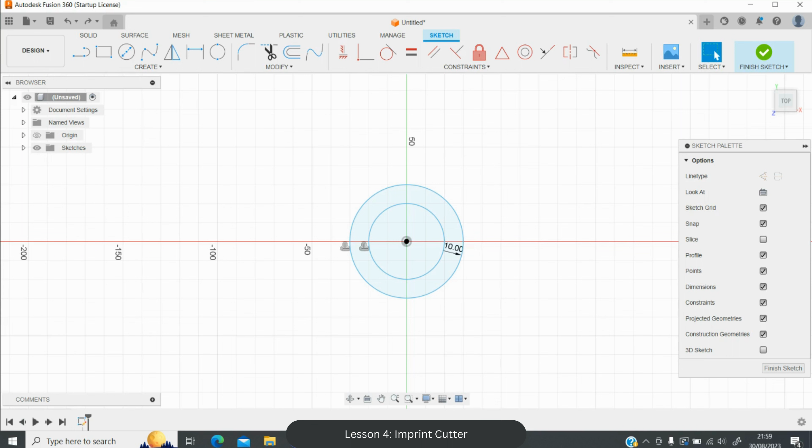So today's imprint - before we go on to that, we're going to look at a little feature that may be helpful now that you've had 3 lessons. Remember when we do our first extrusion, the sketch disappears. So go to your profile, go to preferences, wait for that to load, and in the design tab, find 'auto hide sketch on feature creation', tick that off, click apply, click OK, and that will no longer happen.

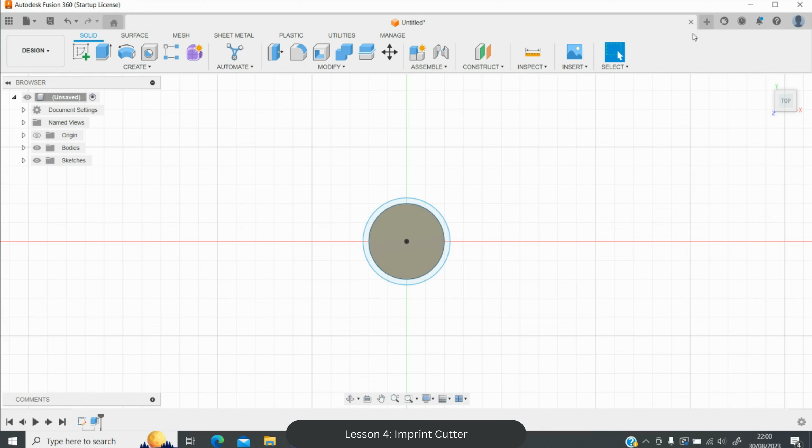Let me not save that, and let me show you now on a new sketch. You can see the sketch remains there, so if that's something you want, instead of flicking the sketch back on after the first extrusion, you can do that.

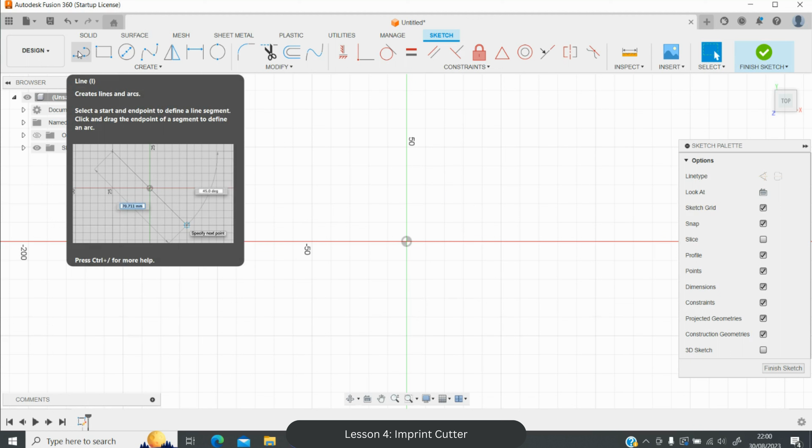So let's start off with a blank worksheet. Again, the top view, create new sketch. This design is going to be very similar to our previous one - it's going to be a petal leaf, but this one is going to have imprint cutters. In future lessons we'll go into more detailed imprint cutters, but this one is kept simple so you understand the features, and then we'll go more complex with more tools in Fusion down the line. We'll also be doing bead rollers and texture rollers, but they are more advanced, so they'll be down the line.

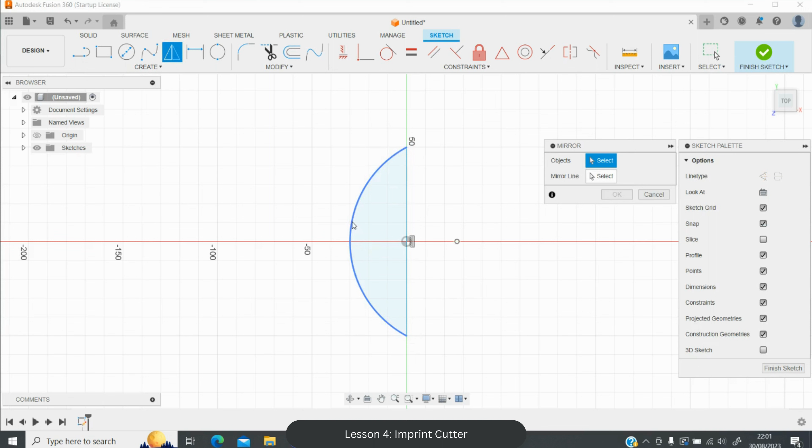So I'm going to start off with my 10cm line and create arc, 3-point arc. Let's escape and create a proper one. Using the mirror tool here, select this, the middle line is my mirror line, click OK, and cut that.

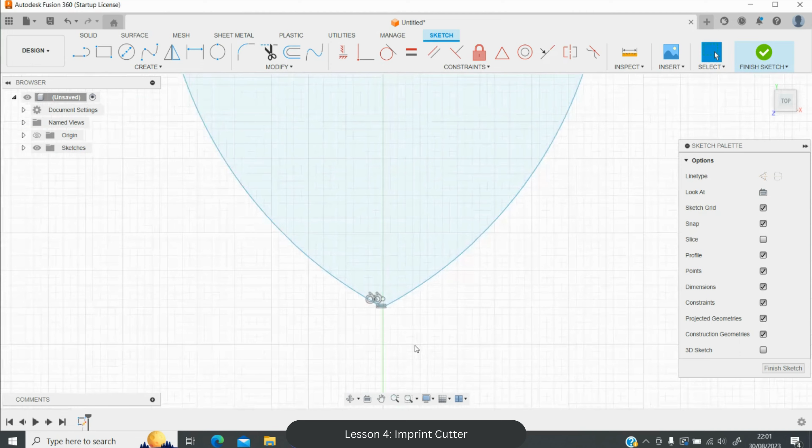Remember, I've set my shortkey on the fillet to Shift and F. If you haven't set a shortkey and want to, click the 3 dots, change keyboard shortcut. Mine is Shift and F - make that 1mm, and we're going to add dots and resize it.

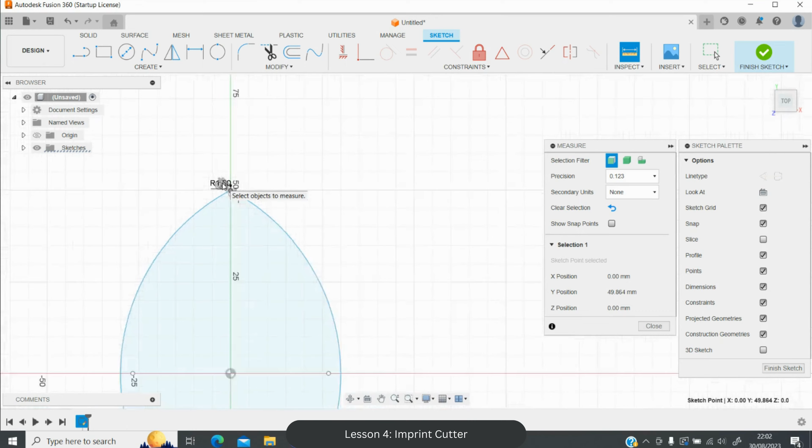Select a point, and inspect from this point down to the bottom. So that's 99.728mm - okay, I'll just remember that one.

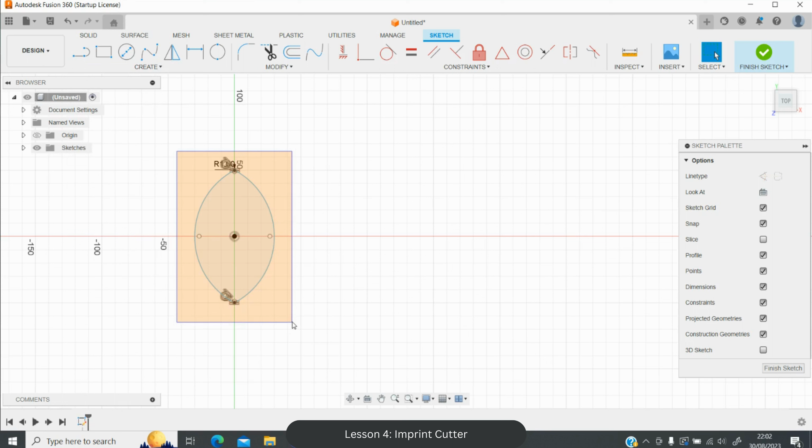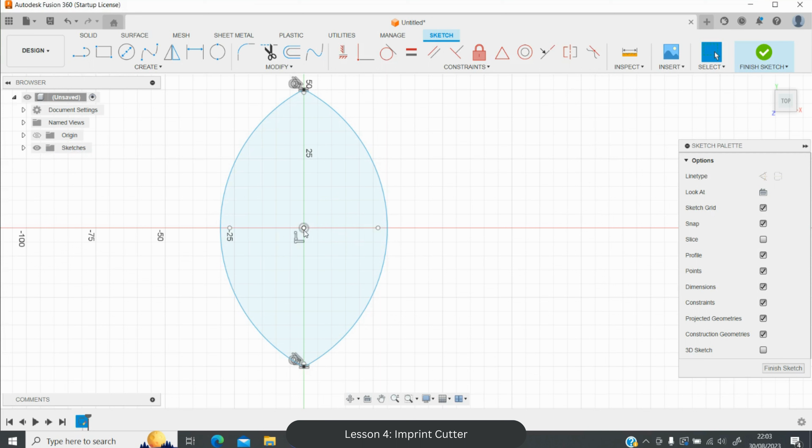I'm going to add a point in though - add the point in the middle, highlight all, point in the center. So I want it to be 100mm divided... was that 99.782? I can't remember, let's have a little look. Or 99.945 - let's quickly rescale that. I got the number wrong there.

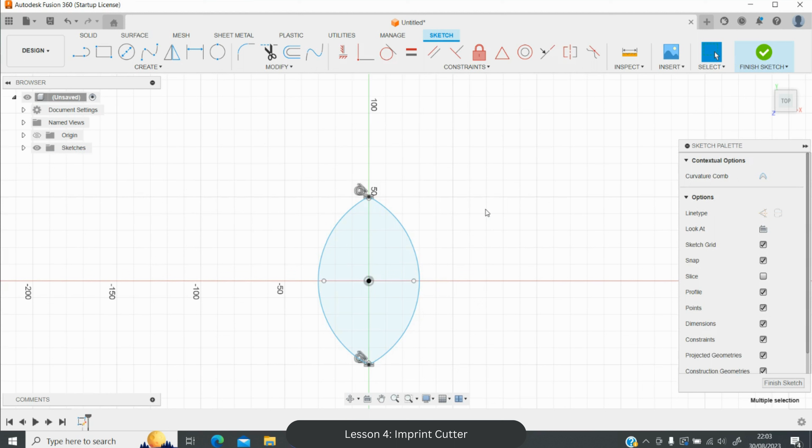There we go, so that is our 10cm cutter. Now, like I said, we're going to keep the imprint quite simple for the moment, so I'm going to cover it all.

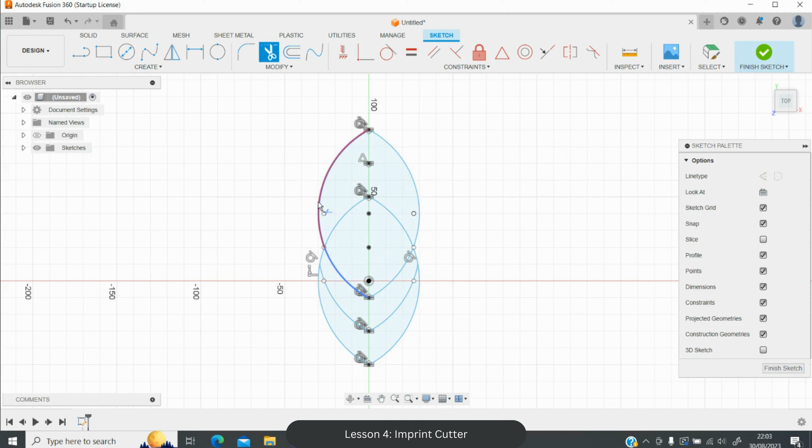Control C, or you can right click and select copy. Click off that and just create a copy directly on top. I'm going to move it up 20mm, that's fine, and snip off that top bit there. Then paste again - Control V - and this time we're going to do 40.

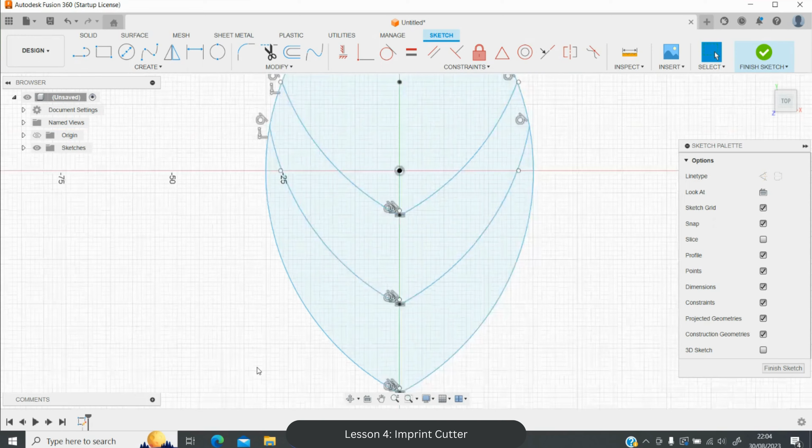So this is basically going to be our design. Now we're going to create a bridge. The area that I'm going to bridge, I'm going to do a line right down the middle.

Now personally - you'll see some people use these areas and completely fill them in as bridges, which I'll show you, but there's a reason why I don't like doing it that way, which I'll explain later.

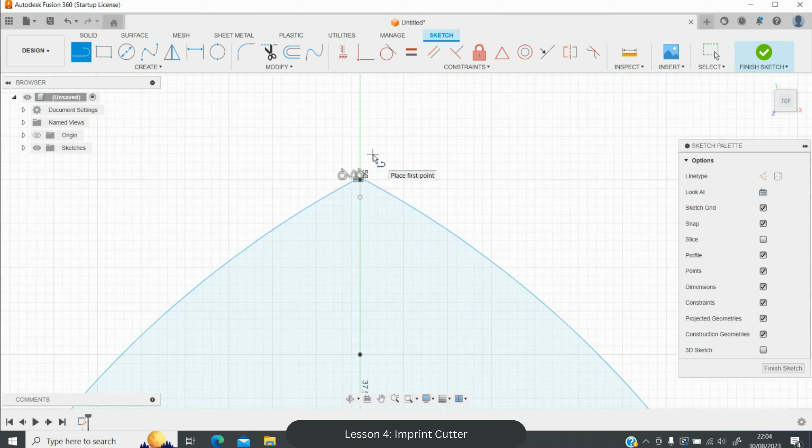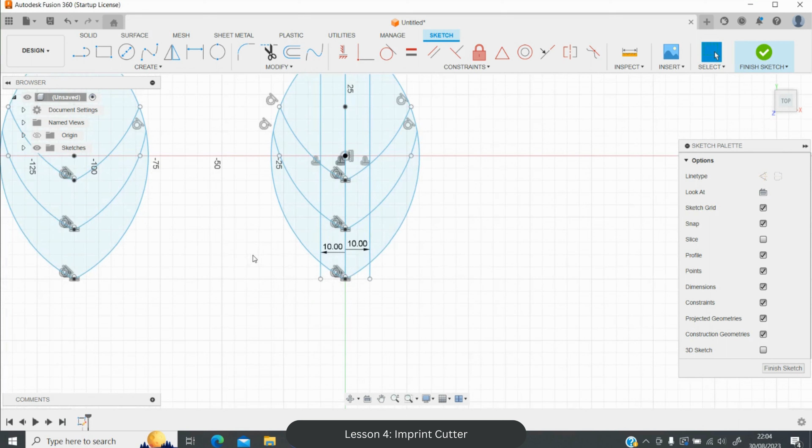So let us just create a center line - not a center circle, a center line. Offset 10 millimeters one side, minus 10 the other. Okay, let's snip off the excess, and snip off the excess here.

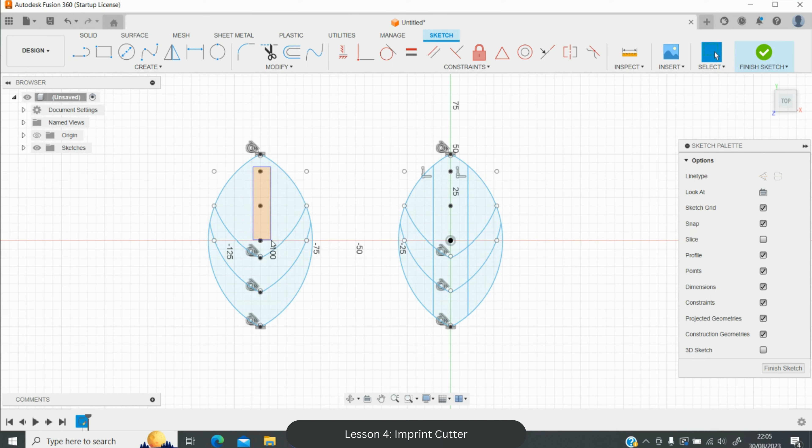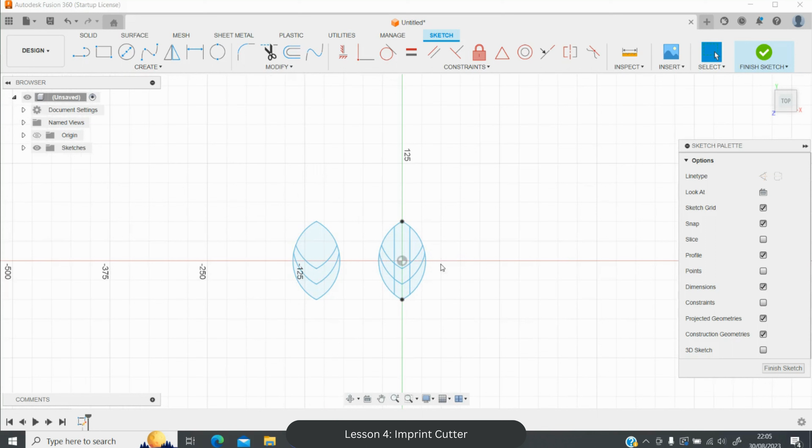So I'm just going to see if I can get rid of some of these dots to make it a little bit simpler - delete those. I don't need these ones here, delete. It just makes it a little bit easier. In your sketch settings, you can get rid of points, construction, constraints, and if you've got dimensions you can flag them on. I haven't put anything on a dimension.

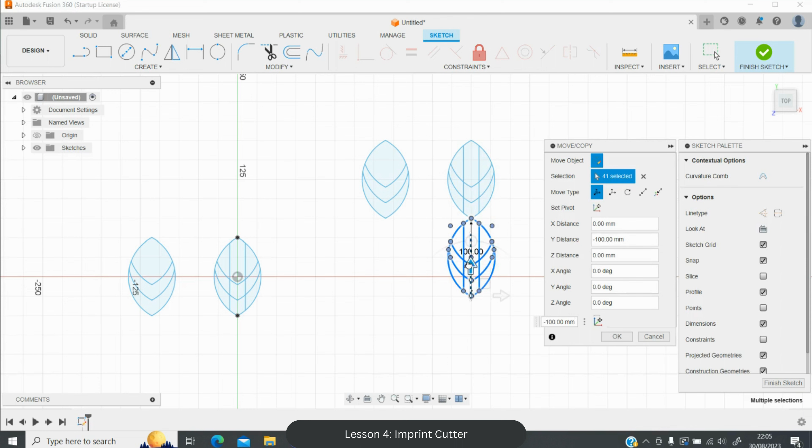So these are cutters - we're going to make a 4 centimeter one and a 2.5 centimeter one. I'm just using this one that doesn't have the center bridge as an example for later on, but this is the one I'm going to be making in 2 sizes.

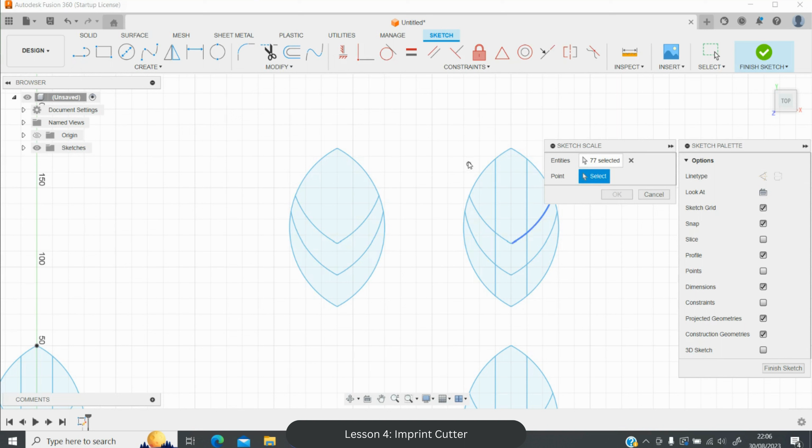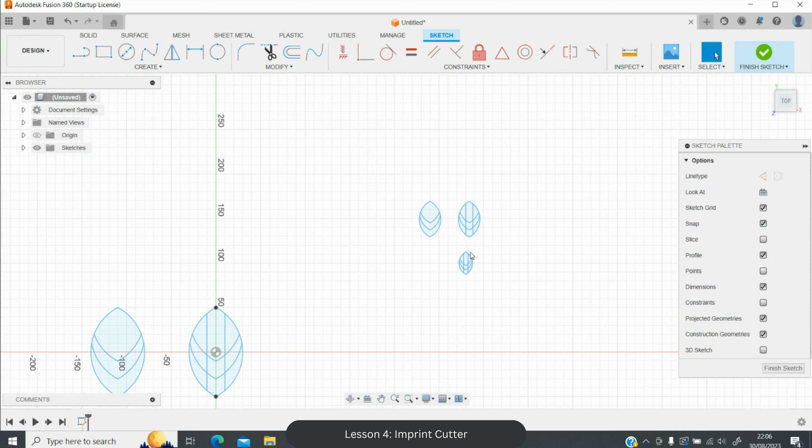Okay, so we'll make these ones 4 centimeters. I'll highlight them both, doesn't matter about the point. I'll select this one up here, 0.4, and drag this one, or scale this one. So select a point, select this middle one, 0.25. So this is 2.5 centimeters, and the other two are 4.

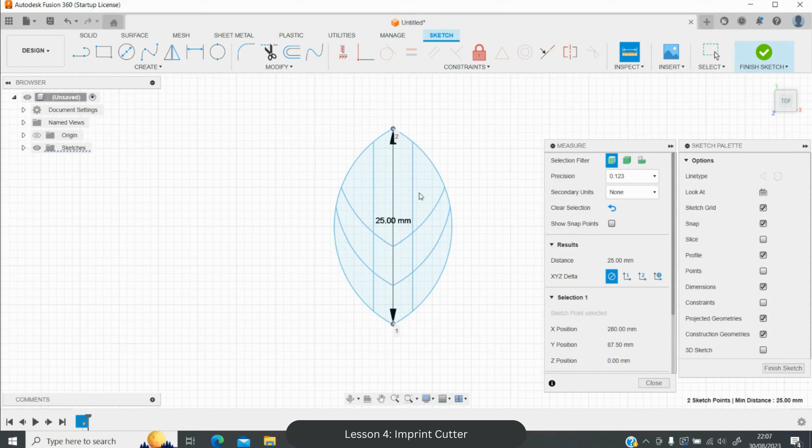I'm just going to bring that up. You want to check the sizes, and you can inspect. Make sure you get this top middle bit here. So you see that's 25.

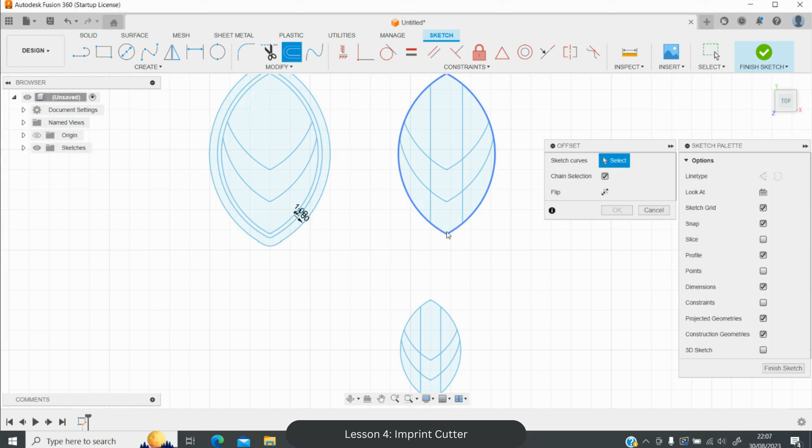So we're going to set our offsets ready. If you remember in lesson 1, and we briefly discussed in lesson 2, I tend to do them in 2 ways. We're going to work on the way that I do it. So O for offset, 1 millimeter out, O for offset, 3. And same for this, O for offset, 1 millimeter, O for offset, 3. O for offset, 1 millimeter, O for offset, 3. So that is my sketch all done, so we can start extruding.

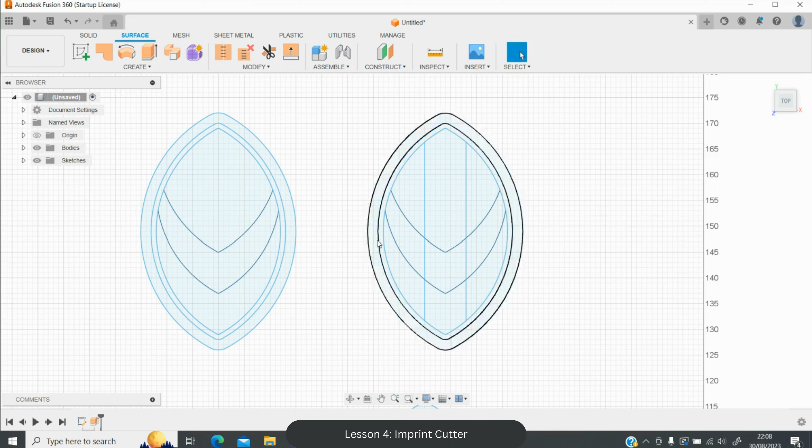Okay, so if you remember the surface thin extrude, we're going to select these lines, and because I make my cutters 12 millimeters tall, I don't want imprints to cut all the way through, so I don't make them as tall as my cutting walls. So I normally have mine at 10.5 millimeters, so it will work on clay thicker than 1.5 millimeters. On clay 1.5 millimeters and thinner, it's not going to leave an imprint. If it's only just a little bit thicker, the imprint will be very, very light. Normally about 2 millimeters, the imprint will show nicely. It's up to you how much you want your imprint, how tall you want that. Obviously lower than the cutting wall, but take into account how thick people use their clay.

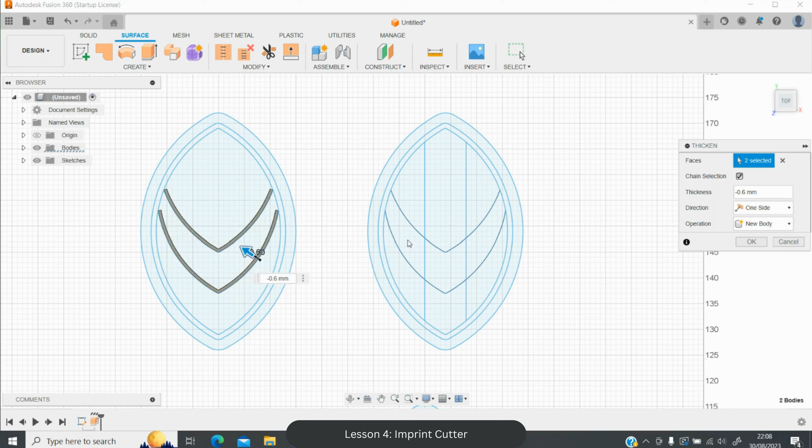So 10.5. Okay, so if you remember the thicken tool, Shift and T if you've set your keyboard shortcut, I have Shift and T. So I want it going inwards, and I normally have mine minus 0.6. 0.6 tends to be my imprint wall lines.

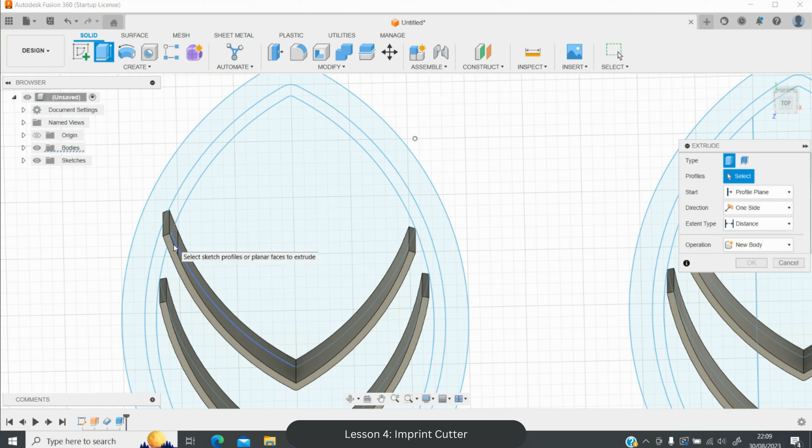Okay, now you can see that these imprints haven't gone all the way past. That is fine, that is normal. So we're going to use the orbit tool, pull it down. Now there is an extrude tool. Quick look, I can't remember because I always use a shortcut. Oh no, it's extrude, sorry, it's still extrude.

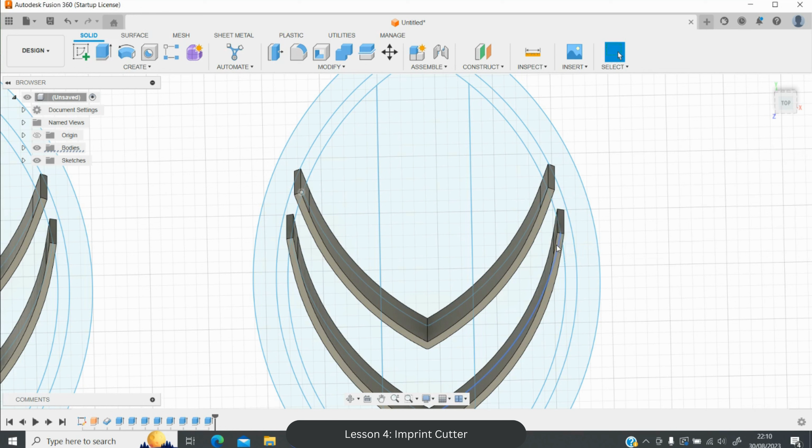So E for extrude. See this wall here? We're going to make it 2 millimeters longer. Don't worry, we'll be cutting the excess off soon. I'm going to work on that on these here. So E extrude 2, E extrude 2, and I'm going to do the same on this one here. So E for extrude 2, E for extrude 2, E for extrude 2, E for extrude 2.

Okay, so we can see my imprints now go past the wall, so we need to cut that off. So we're going to use the extrude tool again. We're going to select both this inner wall and this outer one, because if you look, the imprint line goes onto that wall.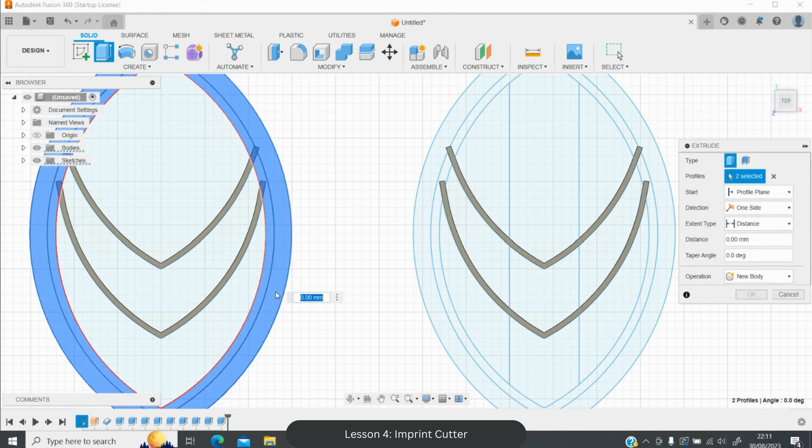Okay, now we're going to do a minus number. It's got to be bigger than the actual imprint wall. So I say minus 20. Oh wait, sorry, it'll automatically go to cut if you do it in a positive figure. So if I say 20, the operation will say cut. It's because there's already bodies in there. If this body wasn't in there, it would be a minus. Because there's already bodies in there, leave it as a positive number. So 20, and as long as that says cut and the number is bigger than what you put in, great.

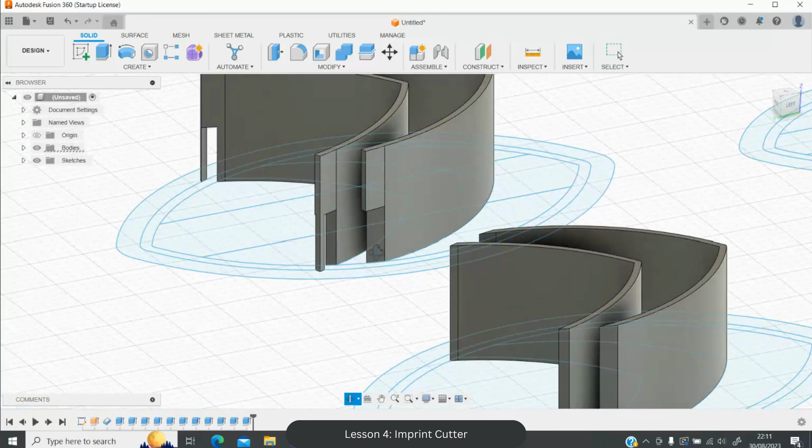Let me just show you in this one. But as you can see, that has cut them nicely all the way to the wall. Now, if I selected a number smaller than it, so if I say cut 5, you will see it's only cut 5 millimeters upwards and left a gap there, which is not what we want. We want it all to be cut. There we go.

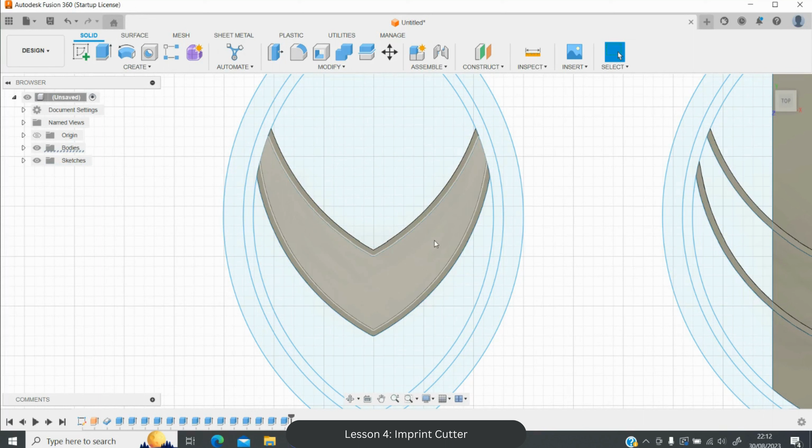Okay, so we are going to do a bridge next. So for this one, I have set the bridge here. I'm going to do it 2 millimeters and it's going to be a join, and that is that. Now, as I said before, some people might use this pre-built in shape as a bridge, so they might kind of extrude here and go, yeah, they're happy with that, or they might decide to extrude here. I'll go into why I don't do that in a bit more in a moment, but let us set our wall.

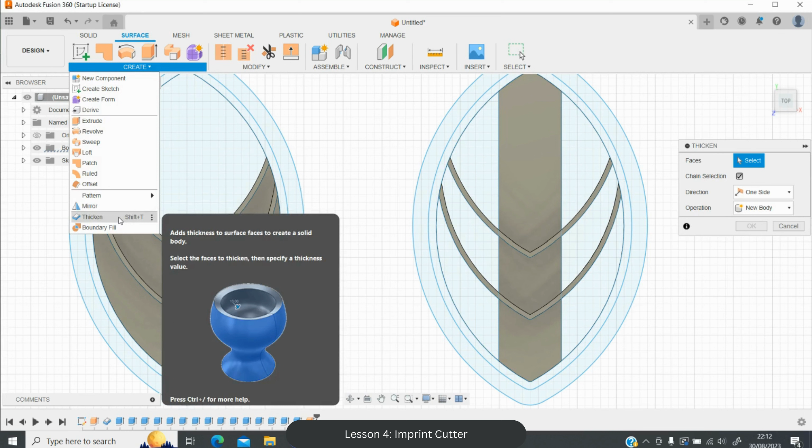So extrude in the surface tool, the inner line, we're making these 12. So Shift and T, the thicken tool, you can set your keyboard shortcut, it's there. So 0.44, 0.44, make sure it's operation join, E for extrude, and then the rest of this wall. So 10, set to join, E for extrude, set to 3.

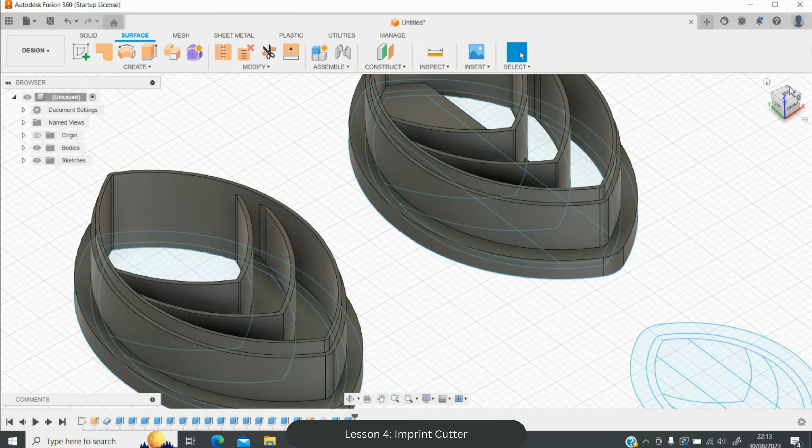Okay, so those are 2 ways. Although this looks quite nice, it will take a little bit longer to print than this straight bridge line. But also, when you're pressing against clay, because this is solid, no air can get in through there, so it's going to create a little bit of a vacuum with the clay, which could mean it's hard to pull out and you could end up damaging the piece.

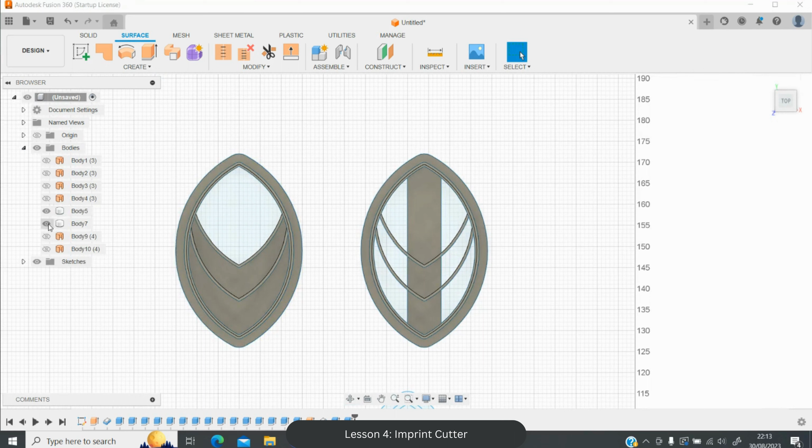Whereas with this one here - let me just flick to the top - there is air holes in every section, so it wouldn't suction and vacuum as much. Especially when you roll out clay on a piece of tile or marble, it tends to stick to the surface. That shouldn't impact it, and it should leave a cleaner cut and probably not pull the piece off, and you wouldn't have to pull it away from the cutter.

So let me just hide the one we're not using. Let me just change it to free orbit, and let me get rid of the sketch. So that is our cutter there.

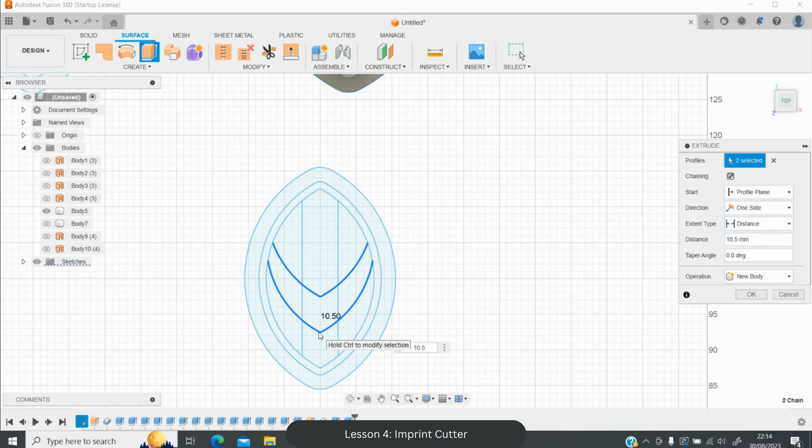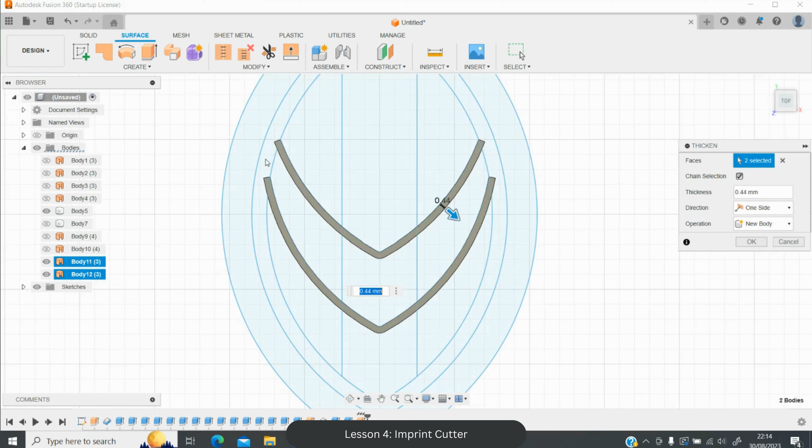We're just going to repeat, because doing things repetitively does help. So we're just going to do the 2.5 as well. Extrude thin tool, both these, 10.5. And T for thicken, or if you haven't set it up, it's create, thicken. Like I said, I tend to do mine at 0.44, and I want them going upwards. There's no harm letting them go down if you wanted, but you probably want to keep them unified. If you did want to go down, you can see the whole line has covered the shape. You can see there's no gap in it, like when you do a -6.

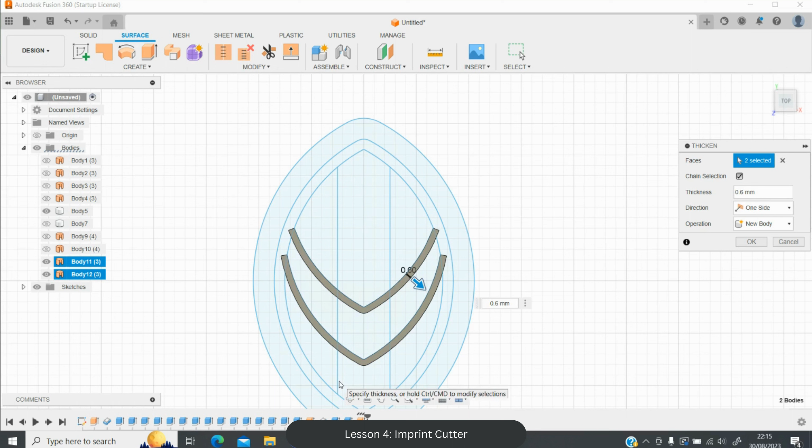We have to extrude, but on smaller ones - for example, if I was doing like a 0.15, this would be coming very close to this edge, and in some cases the imprint might actually be so close to this it wouldn't leave a nice imprint. So you gauge it by the design, in all honesty, but I want it here, so -0.6.

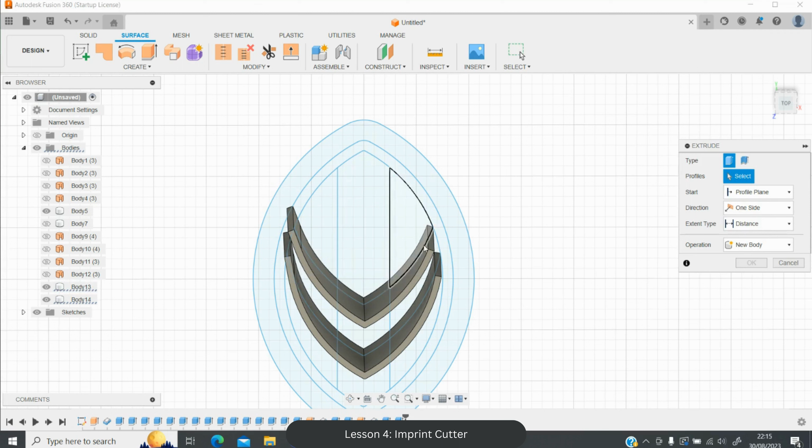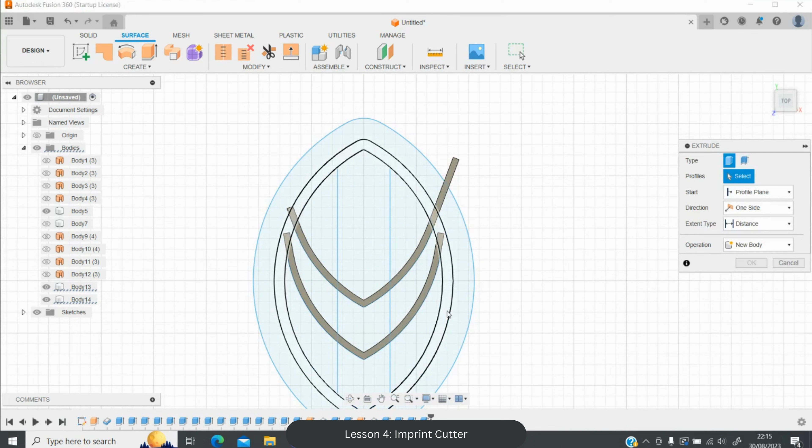Tilt, E for extrude, 2, E for extrude, 2, E for extrude, 2. Right, bear with me, I'm going to make a deliberate mistake on this one. Actually, let me make it on the top one. So let me just make this one 2. And say, for example, I actually typed 7.

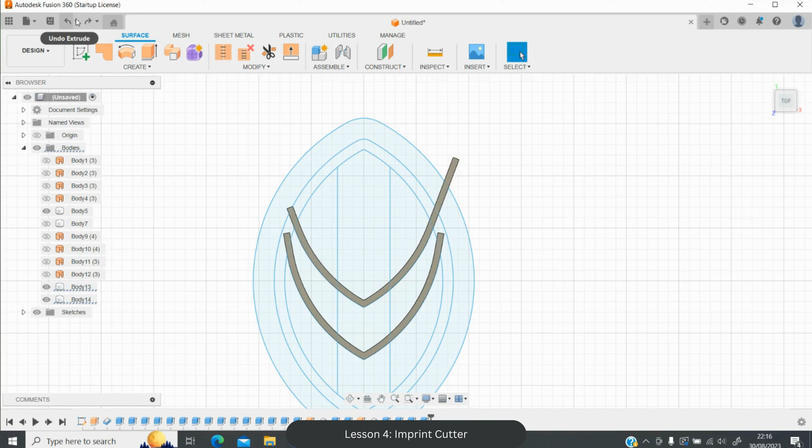Okay, so I'm going to cut off the excess now. Because this area is not in a shape, I can't easily cut it, but I'll go through. So what I would still do is cut off these areas here. I'll do 2, that's set to cut, great. And this is its own body then, so I can hide that, or either extrude, click on that body, and -2. If I tried clicking on that while I hadn't cut this, it would try to delete this whole body. So I would recommend you get rid of this first and then deal with that hangover and joined aspects separately.

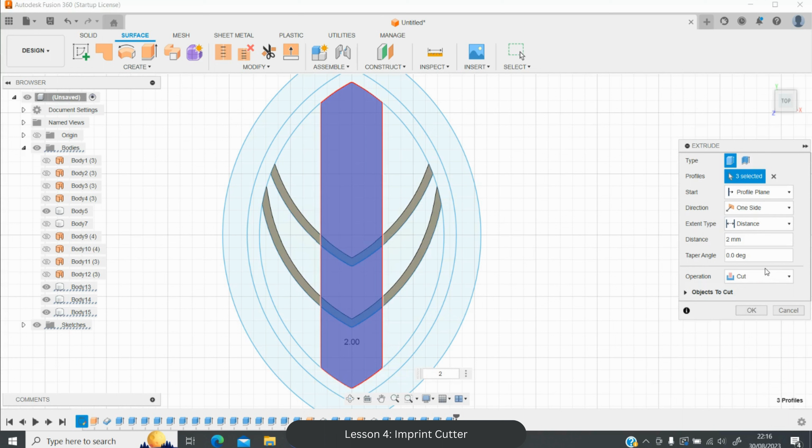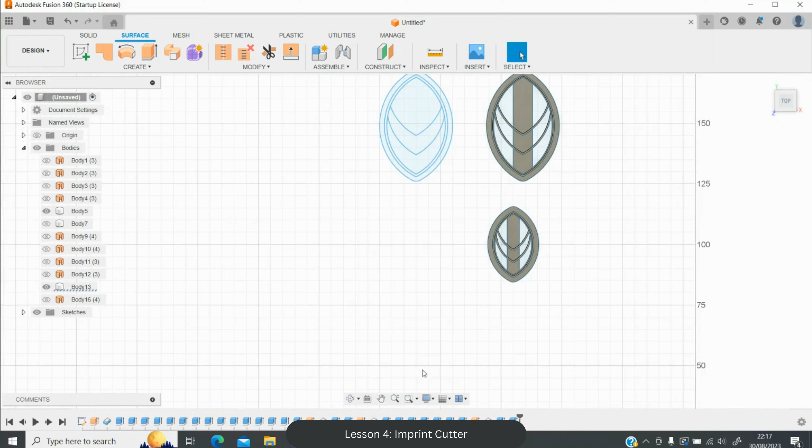There's our imprint lines. 2, join, and that one, 12, shift and T, 0.44, join, E for extrude, join, E for extrude, 3, join, perfect. There is another extrude I also use for imprints as well.

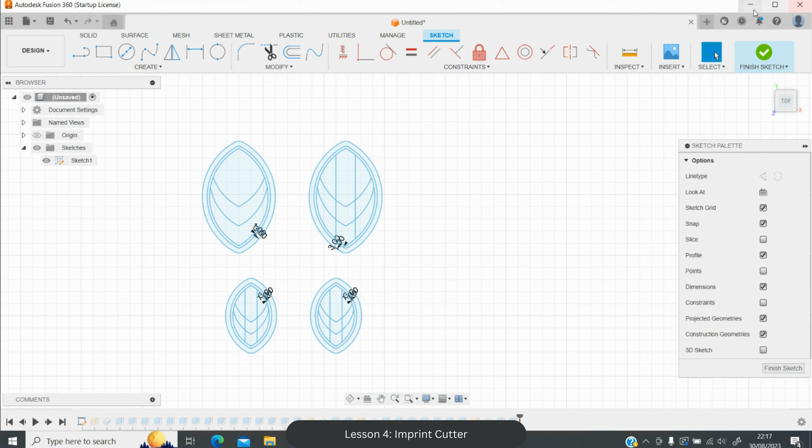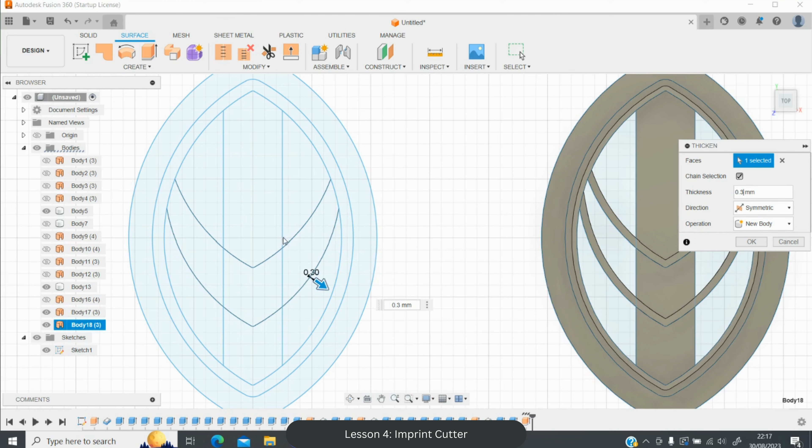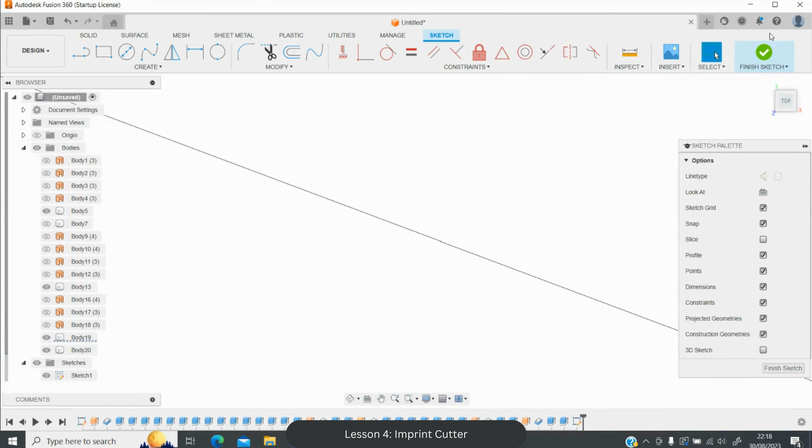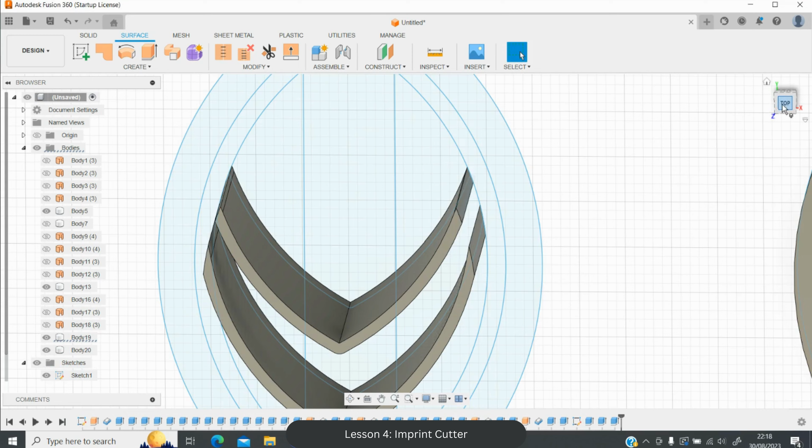Then top, extrude 2, extrude 2. Oh, where have I gone? Let me just get rid of that. I've somehow disappeared. Right, free orbit, extrude 2, extrude 2, extrude, say 20, that's cut off.

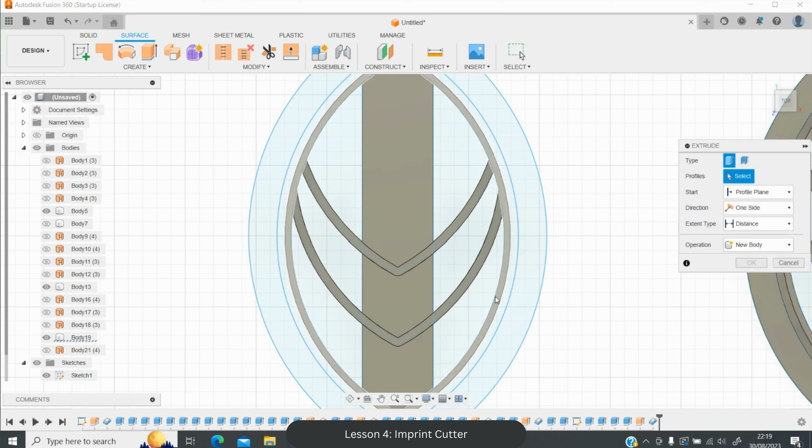And then top, we'll make the bridge. So we're making that 2 millimeters thick, we're making that a join. Then extrude, 12, shift and T or thicken, 0.44, flick that back to one side because we don't want that symmetric anymore. Join, extrude, 10, join, extrude, 3, join.

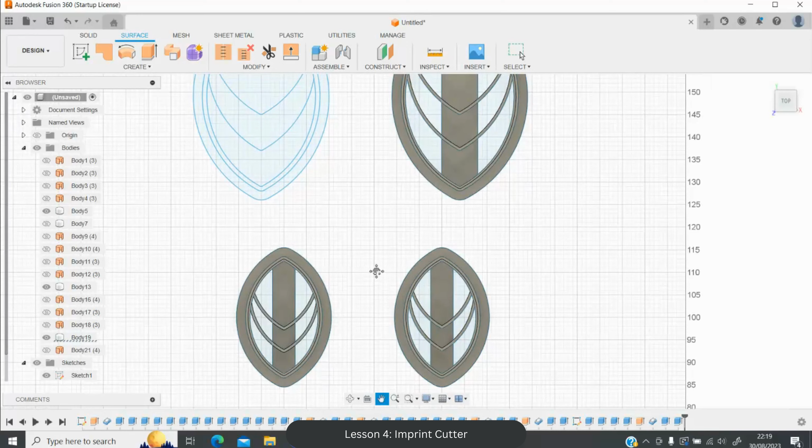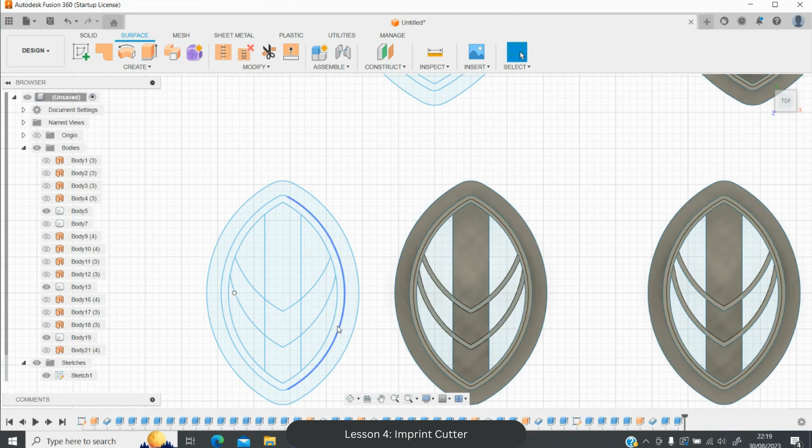So go back to sketch, edit sketch, highlight that. Now, in certain cases with certain lines, it doesn't like the thin extrude. So you might try to lift it up and thicken it, and it's not going to the thickness that you want. It's saying there's an error - I can't remember what the error is, but I'm sure in a future design it's going to come up. This can also happen with outside lines as well. So in this case then, we might offset these inner lines. So O for offset.

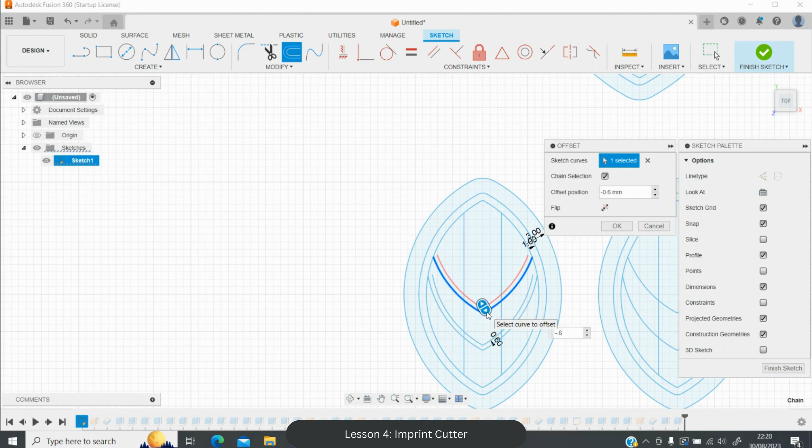So if I set this to be minus 0.6, O for offset, minus 0.6. Okay, so we need to modify, extend. So we're just closing these lines to the wall.

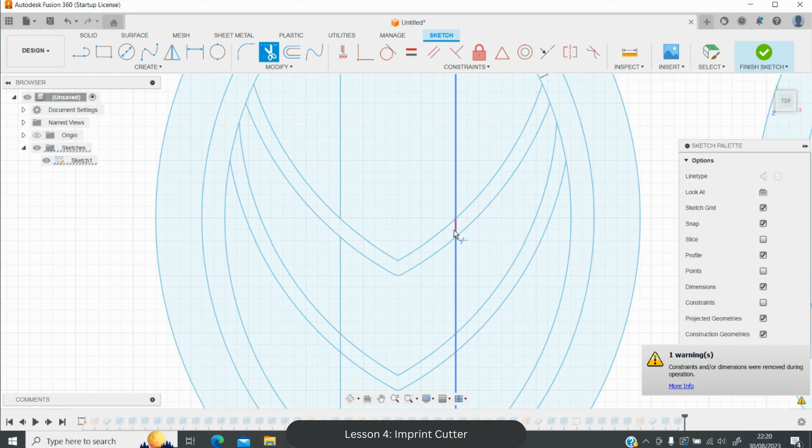And then what I want to do, I want to snip these lines away from inside. I'll just do the top line, and I'll show you why I do this. So say, for example, that thin line extrude wasn't working, we would then make this be the thickness that I wanted.

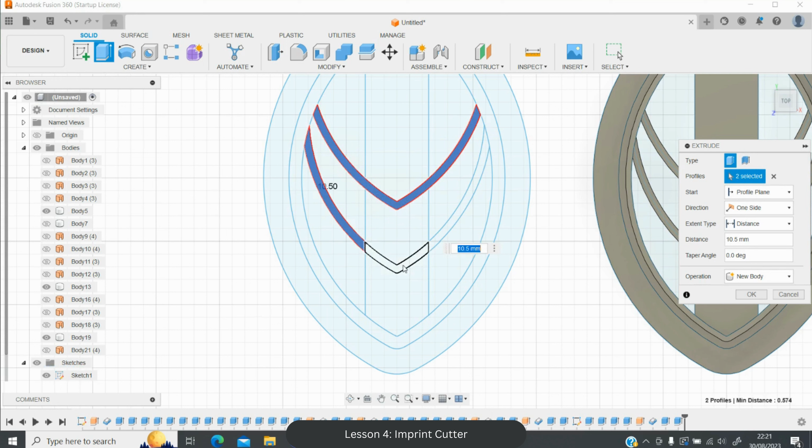Did I set 0.6? Yeah, that's fine. So we'd go to solid, we'd set this as a wall then that we can just fill in, extrude, 10.5. Now, if I hadn't cut the lines, then I would have to go in, it's recognized in different areas because of this line gap here. But because I cut them, it's just one area.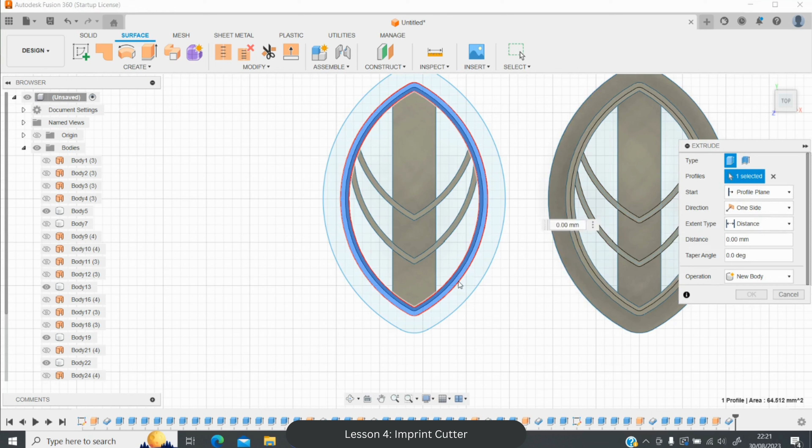So 10.5. Then extrude, would do the bridge. Join. Surface. 12, shift and T. 0.44. Join. 10. Join. Extrude. 3. And perfect.

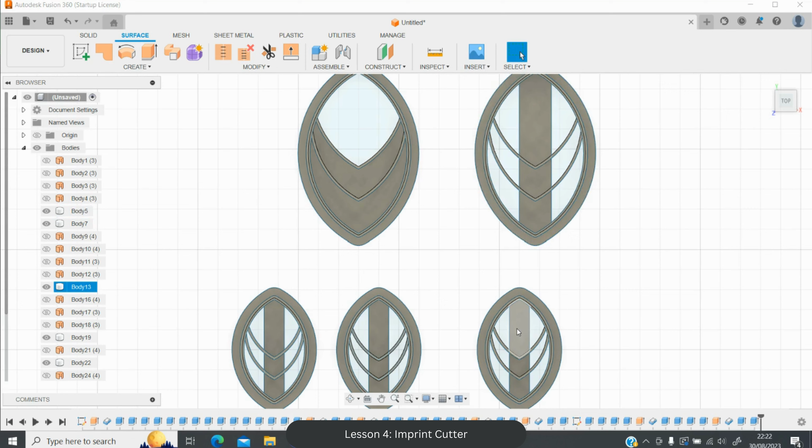So let me turn this back on. So we've covered a couple of ways. One way that people do is not one that I prefer, because of the section. I do like each imprint area to have an air gap. So we've gone this way, which is we thicken the line shorter than the outside cut lines and have a bridge.

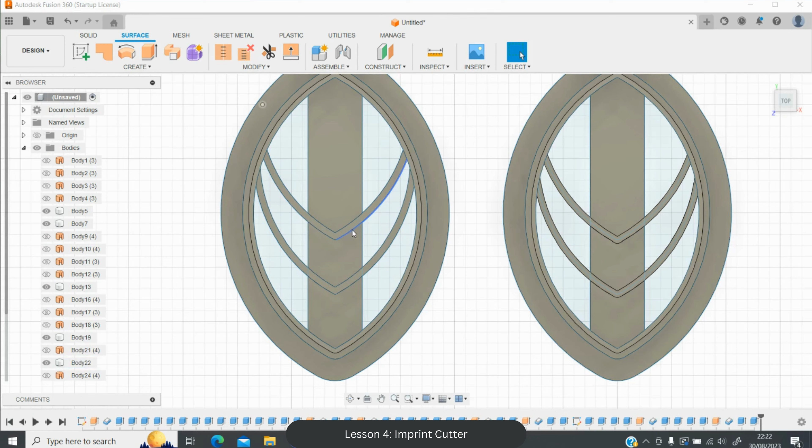This one was the same, but smaller. This one, then we did a symmetrical thicken thing, great. The symmetrical thicken, so instead of being 0.6 going inwards, it's 0.3 either side of it. And then this one, we've set the offset in the sketch feature to move it 0.6 up, and we've used the sketch extend tool to finish the line off.

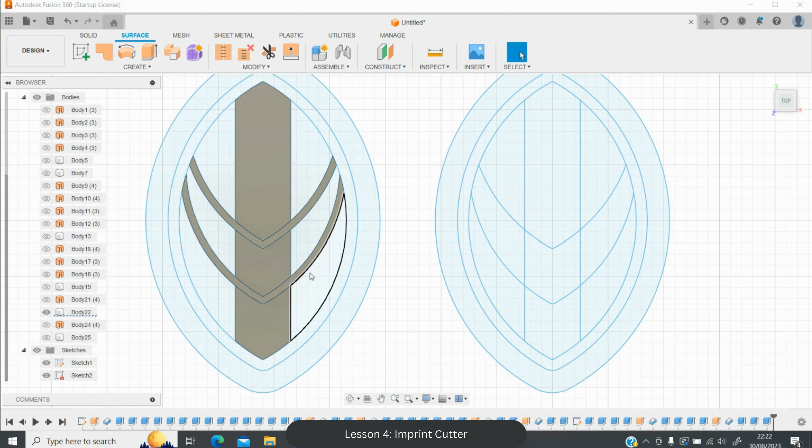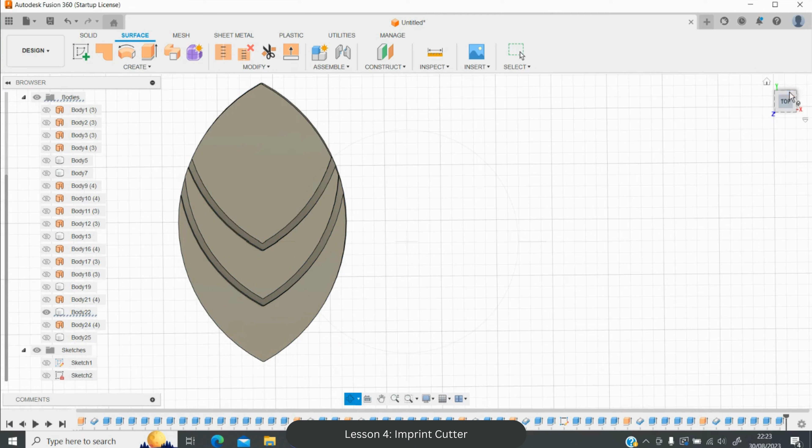So we've got that. And just so if you want to know very roughly how this would look as a polymer clay cutter, let me get rid of these excess bodies. That's what I want. Join. As an imprint, it would kind of look like this tribal kind of Aztec or simple pattern.

And there we go. And as we've covered in previous lessons, if you wanted to save the cutters, let me just get this all back in.

So it is a right click, save as mesh, click OK. You select the folder that you want. So I think I've got my tutorial one here. So new, lesson 4. Label it how you understand. So I know this is a 25mm imprint leaf cutter. And click save. And there we go.

So that's all saved. Okay, so that is this lesson done. There's quite a few other things that we will be covering with imprints, probably another 3-4 lessons minimum before moving off the topic, but this is a very basic beginner's lesson to it.

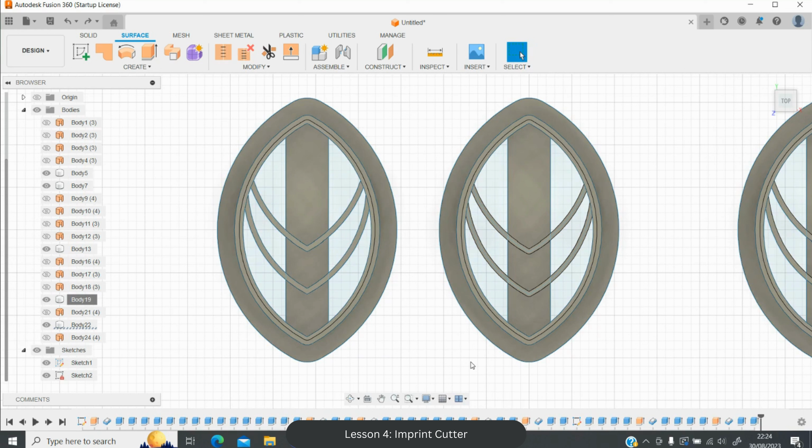Next lesson, it will be another imprint one. It will probably be a flower, because I want to teach you how to use a circular pattern, which is in the sketch. I'll show it to you now. So create circular pattern, that's really good for making flowers. So we'll cover that in the next lesson. That will have imprints on it as well.

And future lessons will be covering more of exactly how I make my STL packs. So it will be a course of probably about eight cutters, 60mm, 55, 50, 45, 40, 35, 30, 25. That's the normal range, depending on if the design allows it. So there will be a lot of repetition, but repetition does help your memory in learning where the tools are, your speed, learning how to fix certain things.

And we'll be doing it on a live basis. You will see, not on a live basis, I will be recording it, but you'll be coming across any errors that Fusion has with my designs. You will see it live, see how I fix it, how I work around, how I problem solve as well.

Also, a future lesson probably in the next couple will be importing canvases, SVGs, DXF files as well, because I know a lot of you do work from them. I will probably make a little video pack for that, because of commercial reasons. I don't want to use somebody else's DXF file or SVG, so I'll probably create my own. There is Adobe Illustrator that I do use. So if any of you do use that and are familiar with it, that might be a tool that might help you in the future.